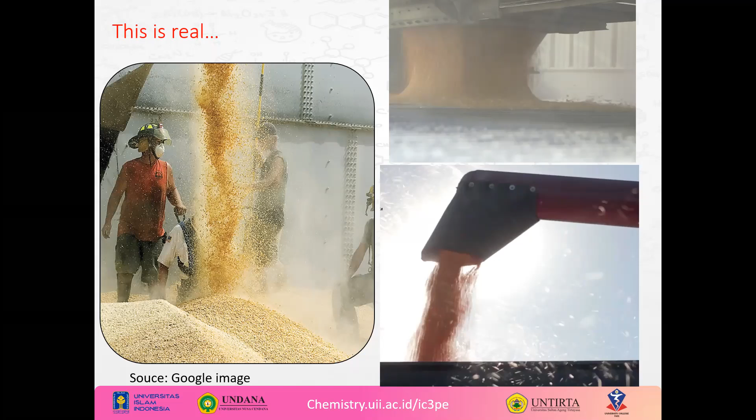So actually, why is the dust cloud formed, and how? What is the mechanism? During the free falling, as you can see here, this is the free fall of the bulk powder. They are surrounded by air, of course. Air is drawn into the dilating material and will force the material to escape to the surrounding. That is how the dust cloud is formed during the filling operation. That is the mechanism.

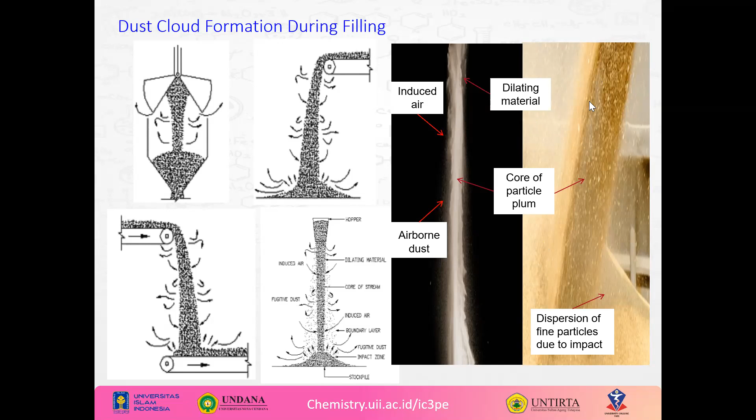One more thing is the dispersion of fine particles at the bottom of the enclosures. This is what happens in agricultural industries. They deal with large masses, with volumes ranging from a few cubic meters to 1,000 cubic meters. We can just imagine that. In reality, 80% of bulk materials are combustible.

Especially when they are stored in large masses, meaning there is potential hazard there. Handling of powders, storing, conveying, filling, and so on will induce airborne dust into the surrounding air. And the filling process induces the powder through gravity force and creates an unsteady phenomenon, which somehow triggers the hazard.

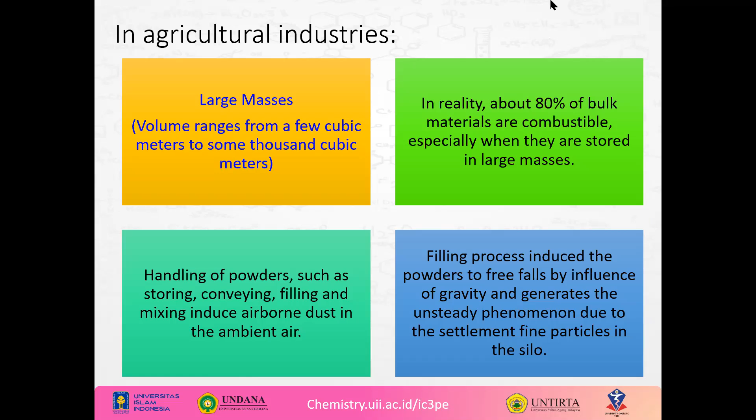So actually, what is the potential hazard? Everybody knows about the health effects, the asthma problems and so on, and everybody knows about the contamination of the facility floor and so on, but few of us are concerned about fire and explosion from the dust. The dust explosion hazard is real and happens in the food industry. Actually, dust explosion happens in almost all industries, but now I am focusing on food industries. So particle technology and so on are researched extensively to understand powder properties.

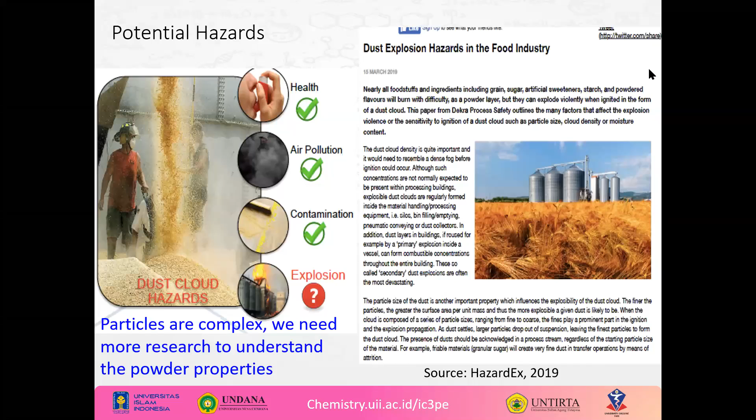Everybody, for dust explosion, there should be 5 factors. We call it the dust explosion pentagon. So what is the dust explosion pentagon? There must be a fuel - the fuel is the combustible dust. There must be dispersion, and there must be ignition, oxygen, and confinement. That is the dust explosion pentagon.

This is an example of tragic accidents in the grain handling industry, from the 1970s. You can imagine handling a lot of grain dust. This dust explosion incident caused 59 people dead and 49 injured in the US.

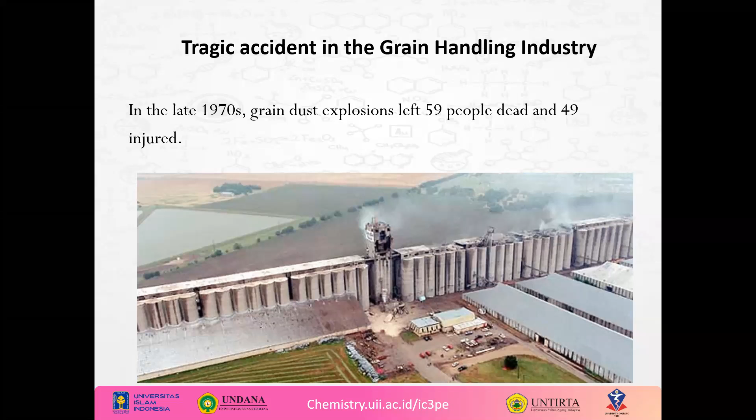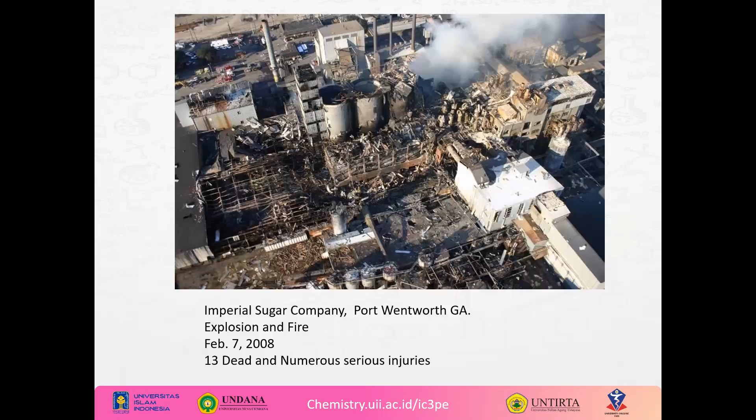In 2008, 13 dead. There are a lot more actually, but I just focus here on a very tragic accident. Now, the recent research and development activities.

We actually start with CFD simulation, computational fluid dynamic simulation, using the work by German scientists on dust cloud formation.

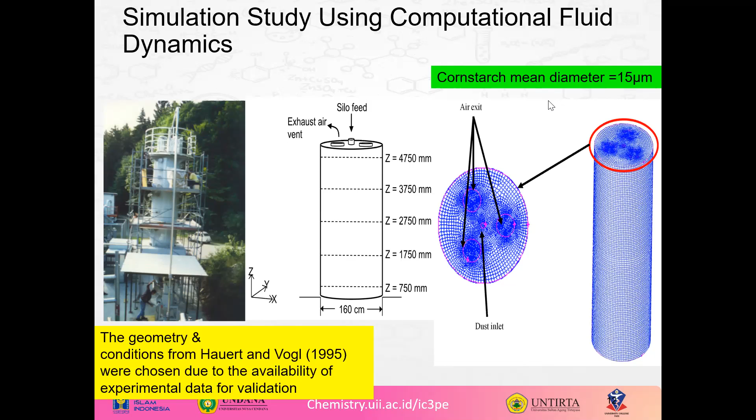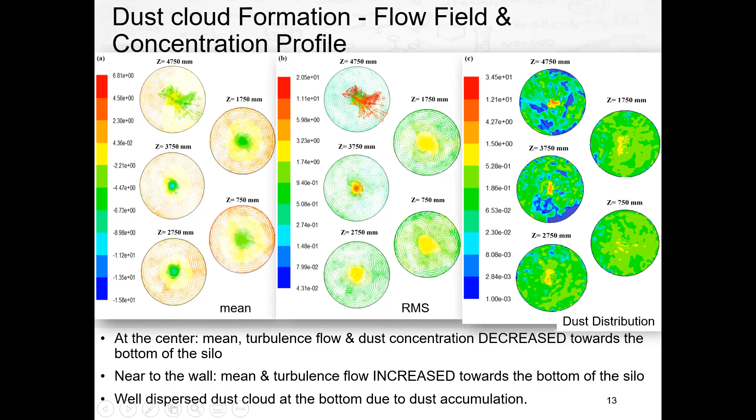So for the dust explosion likelihood, we have to compare to the MEC value for cornstarch - the minimum explosive concentration for cornstarch. So what happened here, we can see that the risk is in the range.

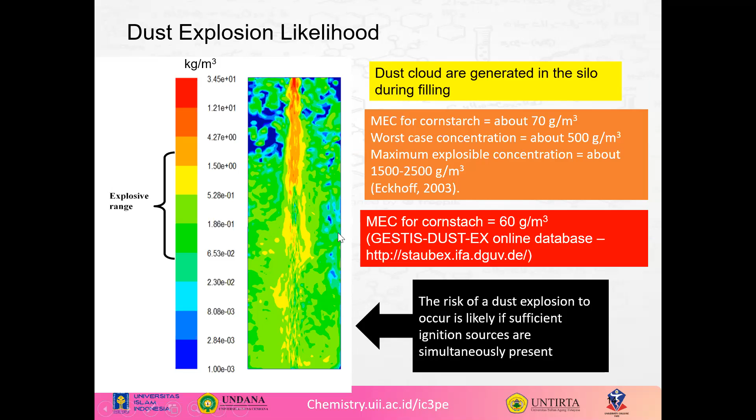This is the case if sufficient ignition sources are present. The study revealed that dust concentration distribution is affected and characterized by the axial velocity and turbulence flow. Near the wall, the concentration decreases and the likelihood for primary dust explosion increases.

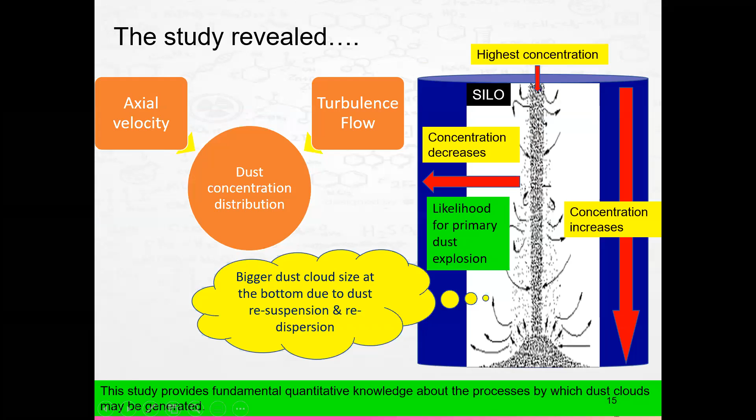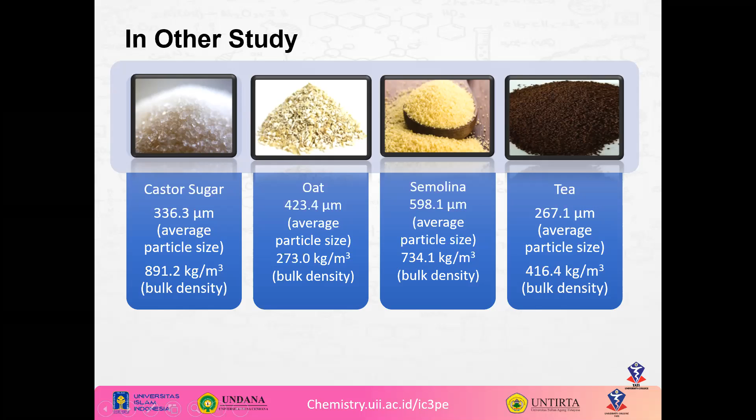We use these enclosures to study the free falling of the powders. In this study we use laser Doppler anemometry to measure the velocity of the particles.

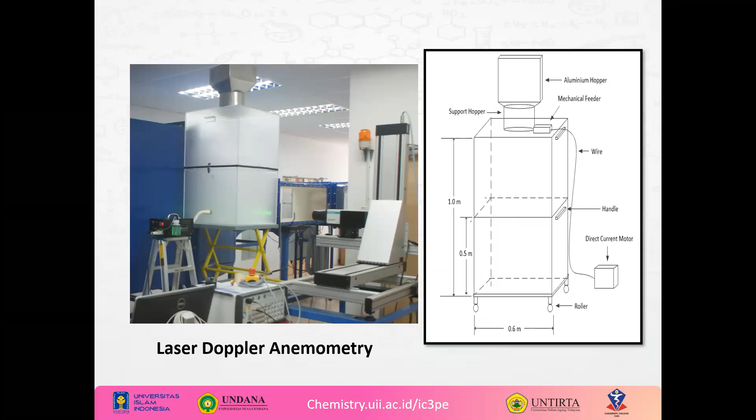So there are mechanisms of clustered particles during free falling, and the clustering during free fall differs based on the shape of the particles. Also, the particle terminal velocity, gravitational force, and drag force are very important forces in the free fall of particles.

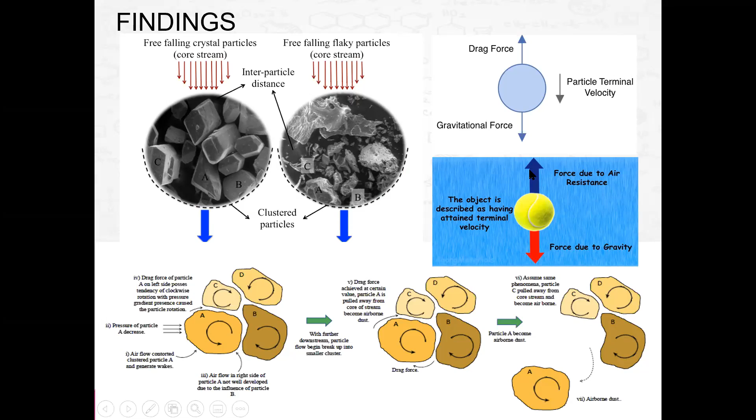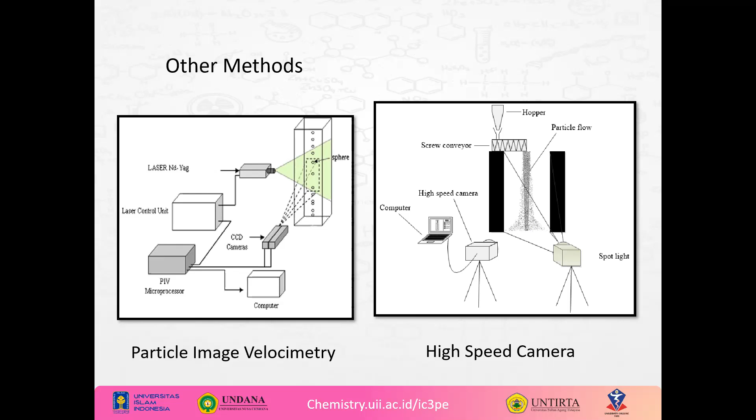The highest dispersion during settling is oat in this case, because of its shape - meaning the oats have a different terminal velocity.

During particle settling, air drag acts on the particle stream and forces the particles to disperse. The oat, due to its flaky shape, disperses more in the surrounding air.

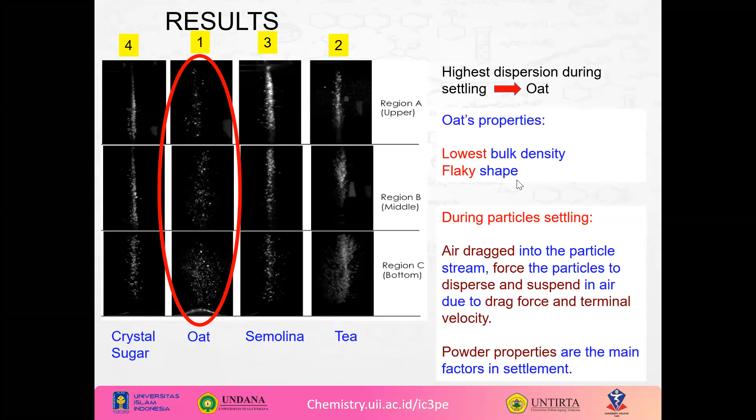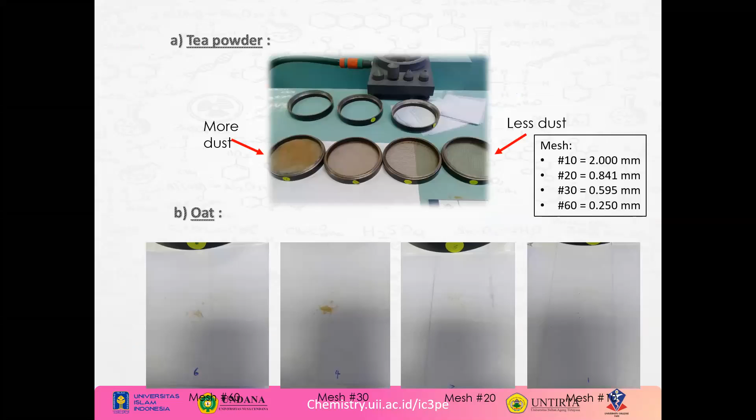This is other current research on airborne agricultural dust using impactors. As you can see here, there is more dust - different from the earlier research - the tea powder forms the biggest dust cloud in this case because of its dispersion, followed by oat, semolina, and crystal sugar.

So in this current research, we can conclude that powder properties play an important role in contributing to dust cloud formation. The tea powder generates the highest airborne dust at all heights.

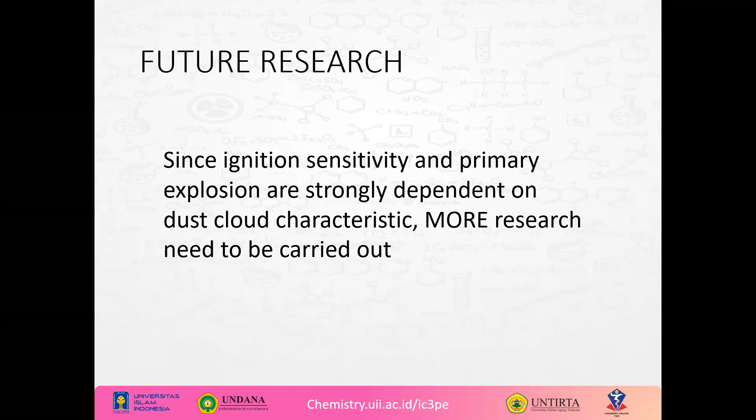Airborne dust refers to particles that stay suspended. This is future research - since ignition sensitivity and primary explosions are strongly dependent on dust cloud characteristics, and dust cloud characteristics are very dependent on powder properties, more research will be carried out to find more data and findings on how dust clouds are formed. So that's all for my presentation.

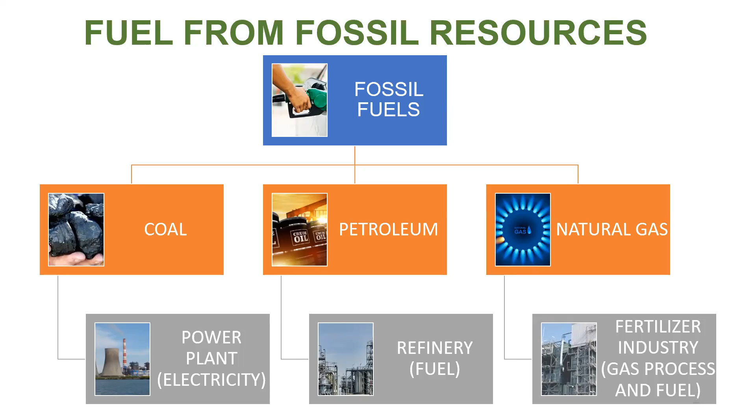All of these are fossil fuels, and fossil resources are unsustainable—we need a long time to produce coal, petroleum, and natural gas. The impact is also not environmentally friendly: coal produces bottom ash, fly ash, and emissions like SOx and NOx, which are problems. It also produces CO2, which impacts global warming.

Now we need an alternative. We can look at alternatives for fuel and chemicals that are renewable resources, have low environmental impact, and are sustainable, producing fuel and chemicals through some process.

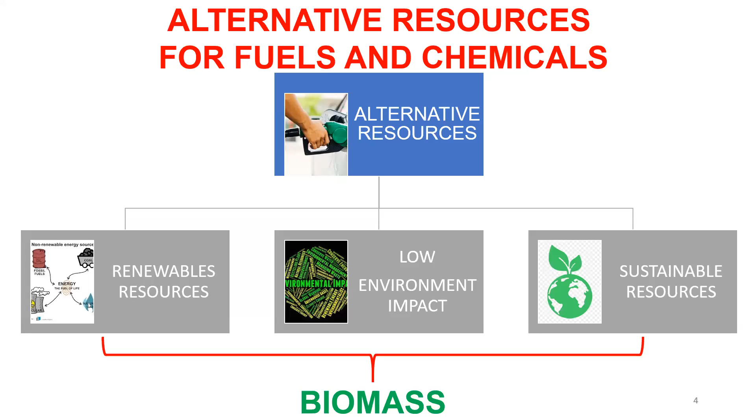Indonesia has a lot of biomass. Indonesia is located in a tropical country, so there is so much biomass produced from agriculture, from the forest, and from animals. From agriculture, rice processing produces rice husk, and farms produce rice straw. The coconut industry produces coconut shells, and oil palm processing produces so much solid waste.

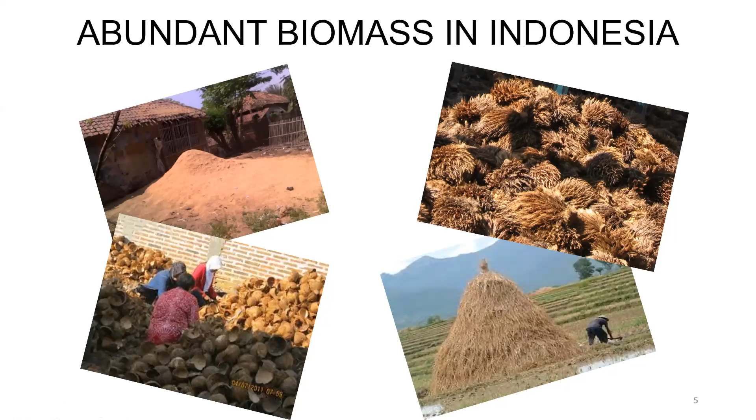We can see the mass balance for oil palm processing in a factory. If we have 1 ton, or 1,000 kilograms, of fresh fruit bunches, that can produce around 70 kilograms of palm kernel oil and more than 800 kilograms of palm oil mill effluent, which is liquid. We can use this waste to produce biogas.

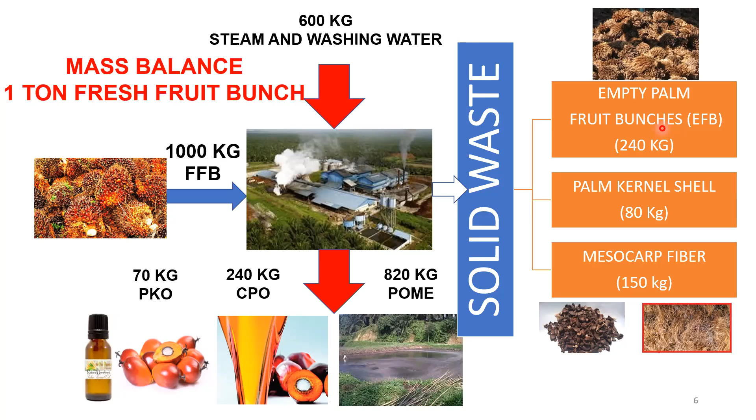But now I want to explain more about the solid waste, especially the empty palm fruit bunches, EFB. If we use 1 ton of fresh fruit bunches, it also produces around 240 kilograms of empty palm fruit bunches, which has potential for energy and for chemicals.

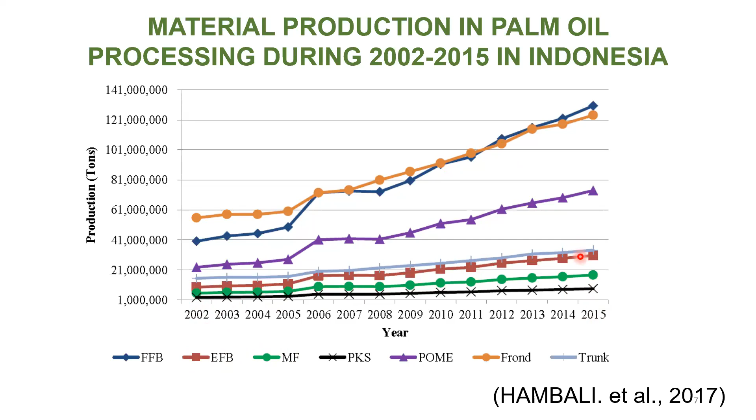How do we produce energy and chemicals from biomass? We have many technologies: we can use thermochemical or biochemical processing. Here, I will explain the thermochemical processing.

In thermochemical processing, materials like palm kernel shells, mesocarp fiber, and empty fruit bunch can be converted by combustion. Combustion only produces energy, which we can convert to electricity. So I think solid waste can replace coal in the future—not replace all of it, but maybe part of it.

Then by gasification, we produce syngas. Syngas is like natural gas, but it only contains CO and hydrogen. This CO and hydrogen can be converted in fertilizer production to produce ammonia, replacing natural gas. Also, from syngas we can produce synthetic fuel by Fischer-Tropsch synthesis.

The last thermochemical technology is pyrolysis. We can produce three types of products: a solid product, biochar; a liquid product, biocrude oil; and the last is pyrolysis gas.

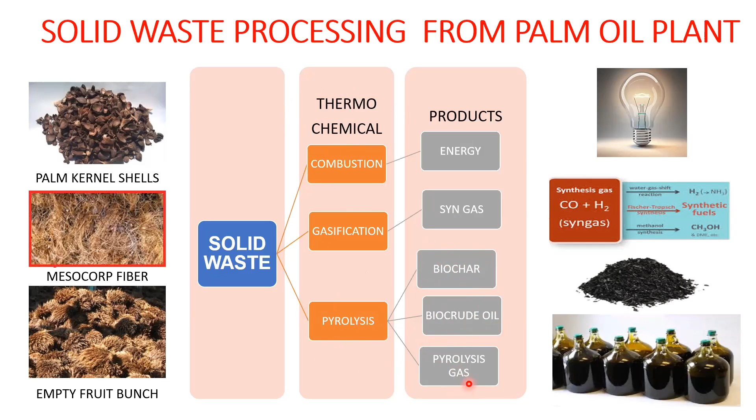Reforming, cracking, oxidation, water-gas shift, dehydration, polymerization, and also gasification. I think pyrolysis has a great opportunity to produce chemicals and fuel because it has a lot of products, not only one type, but three: liquid, solid, and also gas.

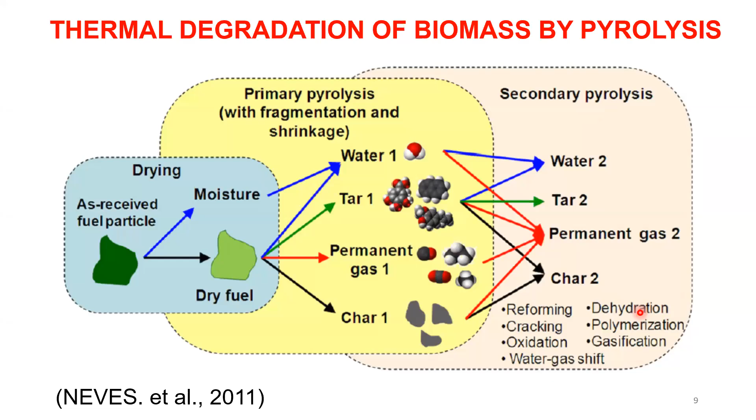Biomass pyrolysis can be categorized into 4 types, we can say modes. The first is torrefaction, at a temperature around 300 degrees, producing mostly solid. Carbonization, or slow pyrolysis, produces almost equal liquid, solid, and gas. Intermediate pyrolysis and fast pyrolysis are mostly liquid. In carbonization, solid slow pyrolysis can produce liquid, solid, and gas.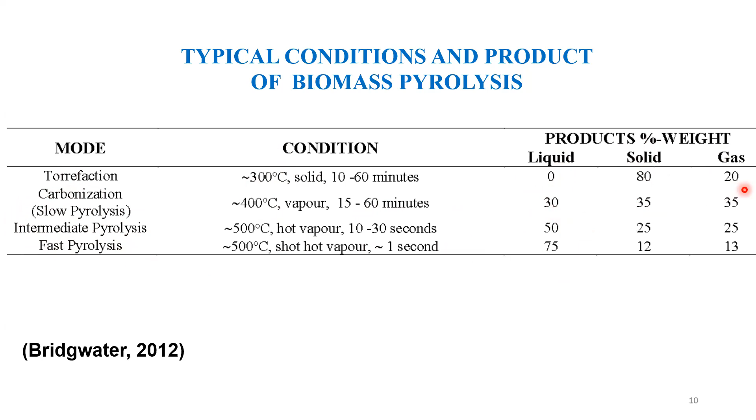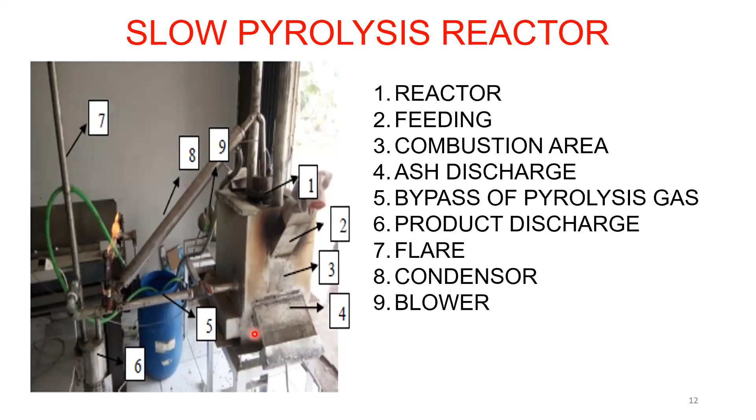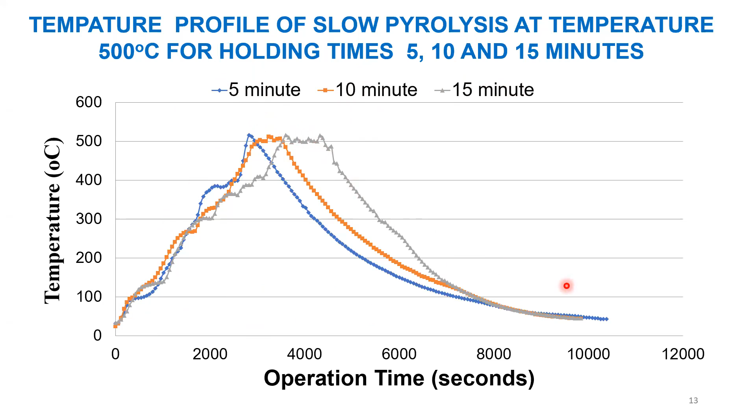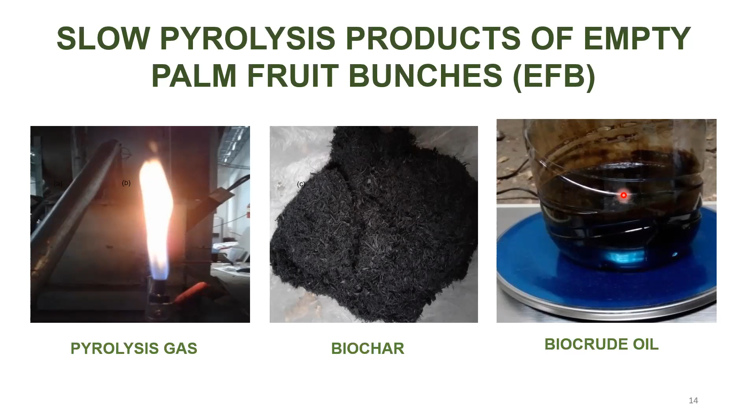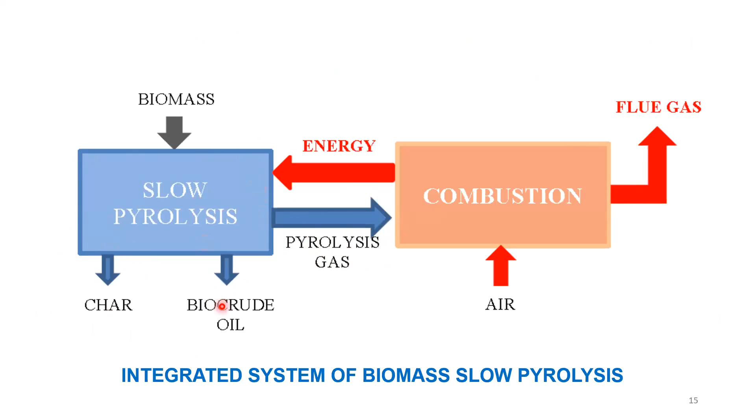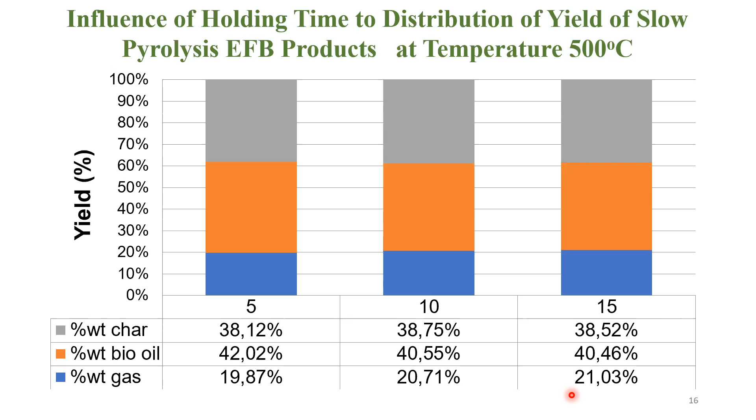Almost the same, 38%. But for the bio oil and gas, we can see that for a shorter holding time, the bio oil produces more than at the longer times of 10 minutes and 15 minutes. For the pyrolysis gas, at 5 minutes it's almost 20%, but at longer times it's more than 20%. I think if we hold it longer, this decomposes the material into smaller gases like hydrogen and maybe methane.

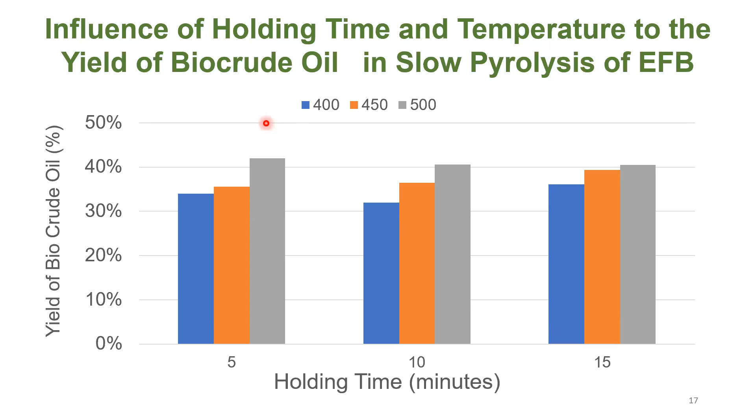I also checked different temperatures, not only 500 degrees Celsius. We checked 400 and 450. Here you can see at 500 it's more than 40%, but the others are below 40%. But we can see that for different holding times, it's almost not so different, only at the 500 degree temperature.

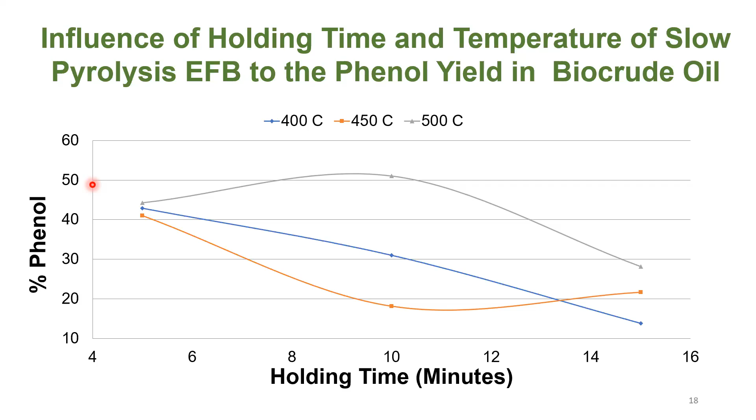And then we can summarize. First, slow pyrolysis can produce not only one product but three products: bio crude oil, pyrolysis gas, and also biochar.

A higher temperature around 500 degrees with short holding time can produce more bio crude oil. But if you increase the temperature to maybe 600 degrees Celsius, the bio crude oil decreases because it produces more pyrolysis gas.